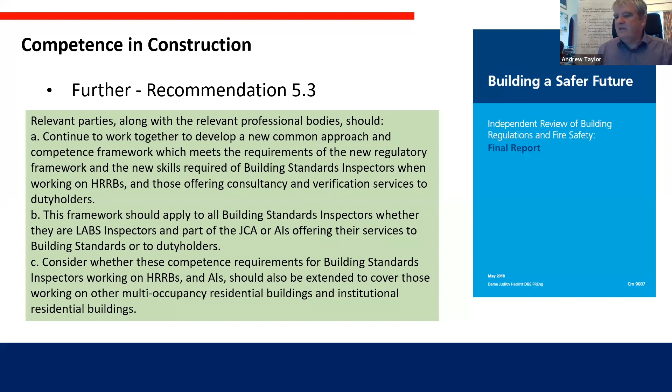So Dame Judith said to us, as an industry, you need to get more competent in dealing with these things. We recognize that, and I'm sure you've all seen that report, read that report, and are aware of it - or at least I hope you are. We'll find out that later.

Now at the moment there isn't a legal requirement currently. The closest thing we have to a legal requirement in England and Wales is this document, Regulation 7, Approved Document 7. It says, and the law states in the green box - text taken from the Building Act - that building work shall be carried out in a workmanlike manner.

So from a competence of install perspective, it's purely about a workmanlike manner. The document describes lots of different ways in which you can prove your work is being done in a workmanlike manner, the first being third-party certification. It also mentions self-certification schemes, history, and testing. Admittedly in our area there's not much done by testing - you don't tend to build parts of a building and set fire to it to check the fire stopping works. But those different methods of proving workmanship exist, and third-party certification is only one of them.

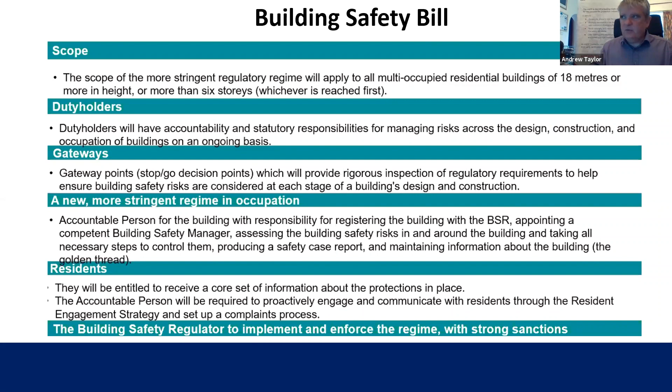Let's mention the pathway to getting through legislation for the Building Safety Bill. The draft bill came out in July last year and was sent to the Ministry of Housing, Communities and Local Government Select Committee for a process called pre-legislative scrutiny. They put out a call and there were about 350 responses, about half of them from people who said, I'm a leaseholder, I'm going to get saddled with a big bill, it's not fair.

ASFP put our comments in about the proposed testing system, and the select committee produced a report, which was produced around October or November last year. What was meant to happen thereafter was we would get a second draft and a response from government as to whether they would adopt the select committee recommendations, and if not, why not.

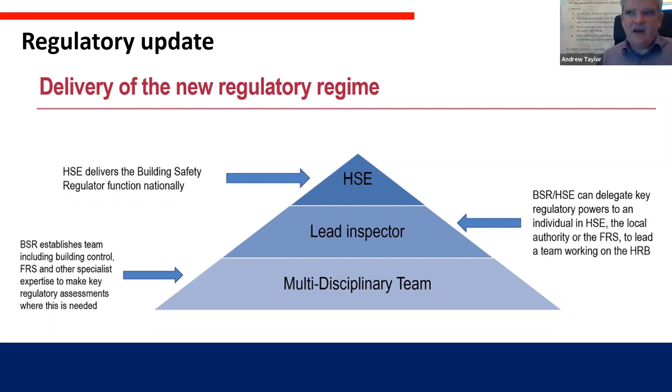We also have a gateway process. Gateway 1 occurs as part of the planning process, requiring a much more detailed fire assessment before you even get to design and permission to build. Gateway 1 gives us an extra step, and that's shown on the next slide.

Gateway 1 goes live under the new auspices of the new regulator as of the 1st of August. So if you're planning a new high risk structure after the 1st of August, there's a whole load of extra stuff to consider. You get a lot more detailed design work happening at the very concept stage before you reach technical design, permission to construct, and permission to occupy.

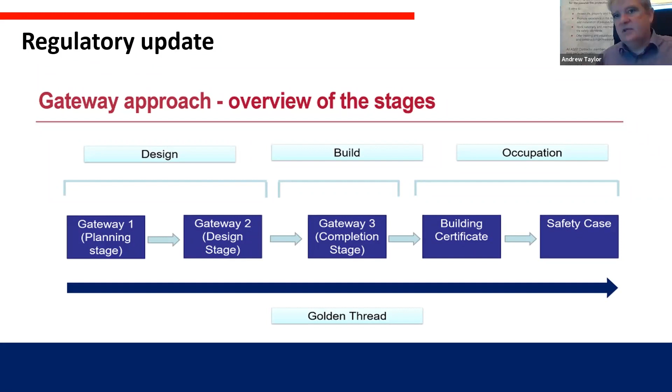As I said, the recommendation was to do secondary legislation concurrently with the primary Building Safety Bill, and we're already starting to see some of that secondary legislation coming out. So we see a new shadow regulator under HSE.

Peter Baker is our new Chief Inspector of Buildings. Gateway 1 goes live for high risk residential buildings as of the 1st of August. We've now got confirmation that the Office of Product Safety and Standards, OPSS, is the new construction product regulator lead, and they've been given a £10 million budget to set up a team to look at that.

There is one missing piece of secondary legislation: the definition of high risk. At the moment, high risk is set at an arbitrary 18-metre height. MHCLG ran a consultation in early 2020 asking for views, and the responses suggested we may need a more holistic approach. There's been mention that they may reduce 18 metres to 11 metres, but we're still awaiting the outcome of that consultation.

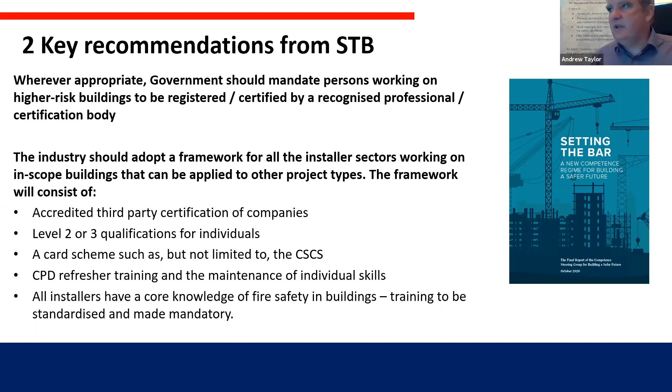Going forwards, the government's going to take on a higher profile role, and basically give this whole area of work to a committee of industry competence, which the regulator will sit on and lead. So the HSE will be involved, and they will be publishing in this area, for the moment, non-statutory advice and guidance. So there's information coming forwards there, and we'll look to see how that committee changes over the next 12-18 months.

Beyond that, I'm sure many of you will have seen this - BSI has published a document, BSI Flex 8670, which is a code of practice for competence in building safety, for construction. That document defines competence in terms of skills, knowledge, experience, and behaviours, and those 4 criteria are very, very important if you think about how we go forward.

So when we're looking at what will now happen, there will be a series of development of bespoke systems and competence schemes, and they need to consider those 4: skills, knowledge, experience, and behaviours.

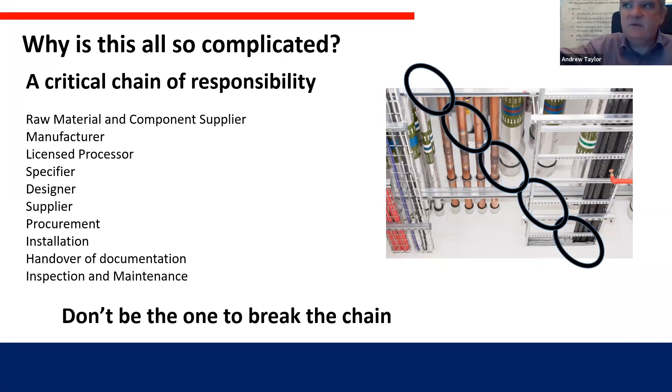Okay, so that covers competence. I'm going to blast through this next bit. Why is this all so complicated? Well, the answer is that when you look at something like that picture, there's a really critical chain of responsibility as it passes through, from raw material and component suppliers through to design specifiers, designers, suppliers, and you need all the people in the chain to be competent to ensure that is achieved correctly.

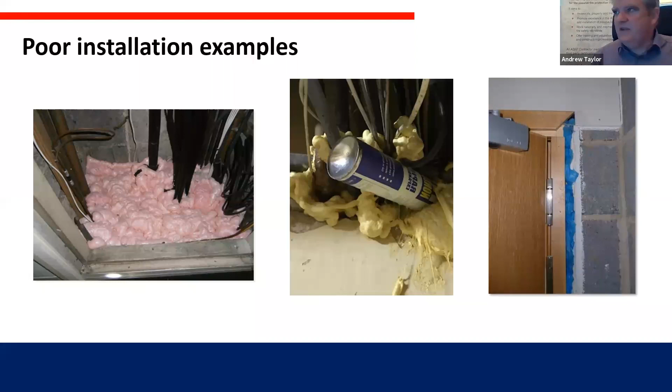And you'd far rather that than some of these things. We still see the pink foam seals appearing on LinkedIn. These are a couple of my favourite horror pictures. Whoever thought that shoe covers were fire resistant? It's obviously not been done properly, and they are historic, but we still see examples of these sorts of things.

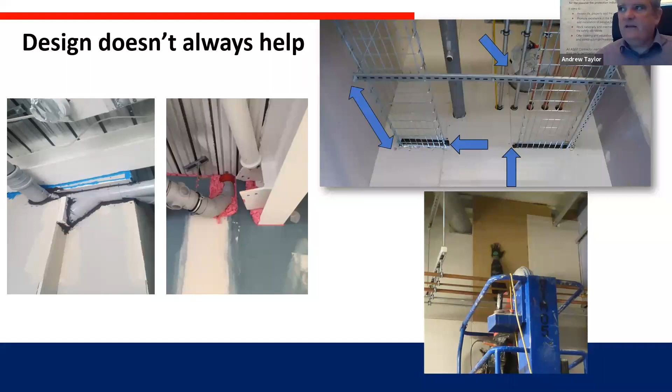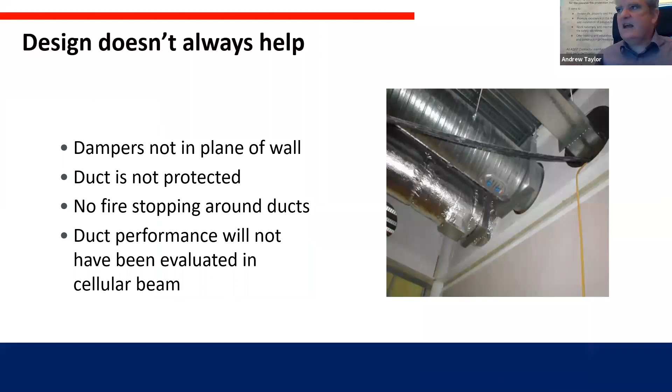And of course you get things like this, really quite complicated details where there's all sorts of complex interactions - have these been considered as you bring different building systems together? You've all seen, I've used this one before - whoever's done the job on this seal has installed a fantastic thing, spatial coordination, brilliant, but fire stopping, absolutely no chance. There is no standard at this stage - we're still working on one that would enable you to do that all in one fell swoop opening.

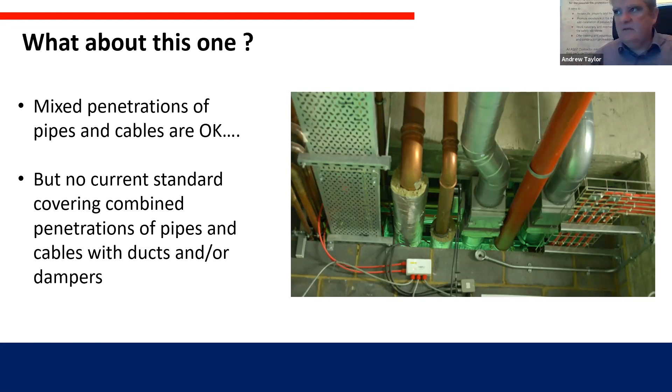So that's it, really. It's a very, very complicated subject, and I'm sorry it is, but if you don't deal with it correctly, you can potentially make mistakes.

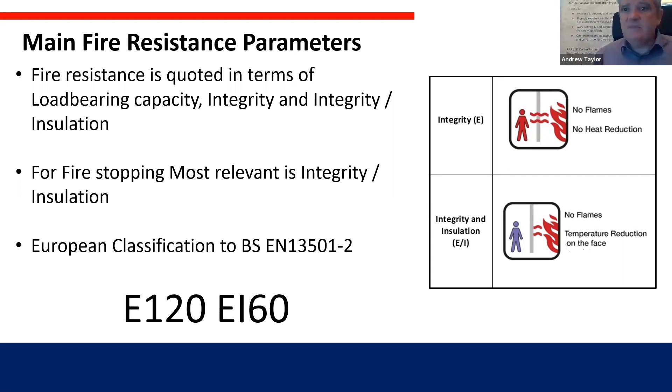We mentioned with those previous slides about design, why we design in that way. Well, one of the challenges is, of course, we have design and build. Now, whether under Hackitt, for the high risk buildings with Gateway 1, we'll have to see more and more of the design done up front rather than design and build. Design and build saves time, but conversely it means quite often you're still designing passive fire protection systems as you build the building, and you could have made mistakes very early on in the design, as we saw from that spatial coordination picture, which could leave you with problems.

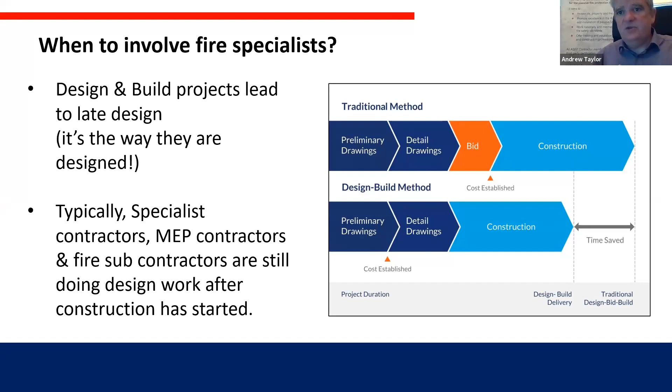So basically what you need to do is involve specialists as soon as possible, and don't leave it to design and build, because that way you could find you're going to end up costing yourself more money and more time, and leave yourself in a situation where you have to go for engineering judgments and technical evaluations to deliver your performance.

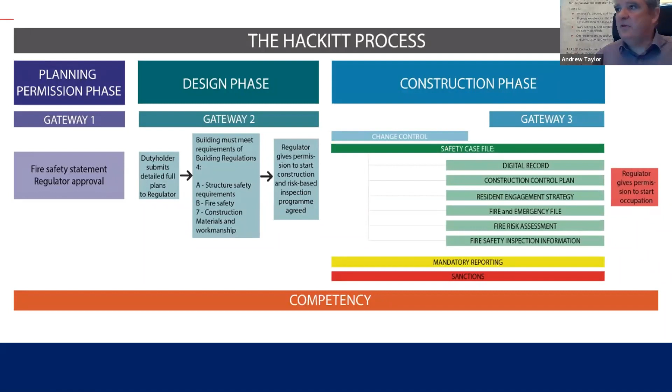So that's our Hackitt process. Hopefully what we'll see with this in Gateway 1 is that there'll have to be some sort of fire safety statement, and hopefully that will see more of the design work being done earlier, and therefore fewer situations where we produce something that's really difficult to do the passive fire protection for.

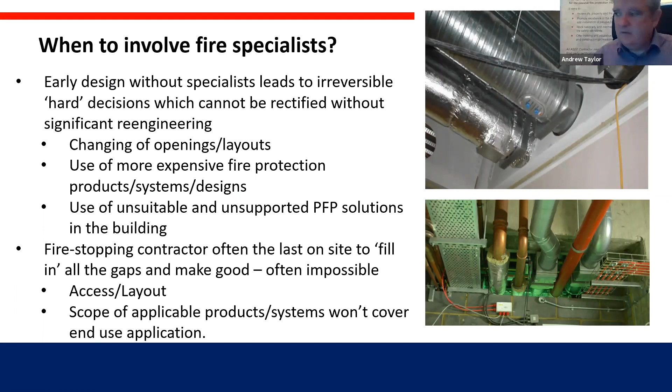Now beyond that, when to involve fire specialists - again, what I'm trying to say is get us in earlier and talk more about it, because you've got to do this to get it right.

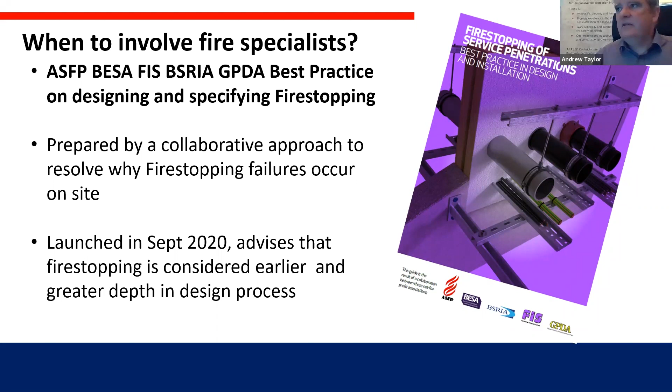We produced a joint guide with FIS, launched September last year, where in terms of fire stopping we said consider it earlier and in greater depth. We put that document on the website, and it has 9 golden rules.

Golden rule 1: talk earlier. One of the golden rules is talk in more detail later on, and make sure you've got third-party certificated products installed by third-party certified installers.

There are 37 questions that you would need when you're designing a fire stop - 37 questions in that guide. Are you going to have the answers to all of those 37 questions? That's why you need to be aware that there are 37 questions, and then make sure you've got the right people involved to ask those questions of.

Well, we'll canter through this bit. In terms of how to interpret evidence for PFP products, there's an awful lot of information out there, starting with the lowest quality and lowest verification being manufacturer's literature, all the way through to third-party product certification and CE mark, which is underpinned with all sorts of checks.

Manufacturer's literature and data sheets - if it says it's tested to, it's designed to, it complies with, you don't know if it was actually tested. If it's designed to or it complies with, you don't know whether it was even tested. Was the testing done impartially? Have you got the correct level of performance? The infamous burger pictures - is that potentially misleading?

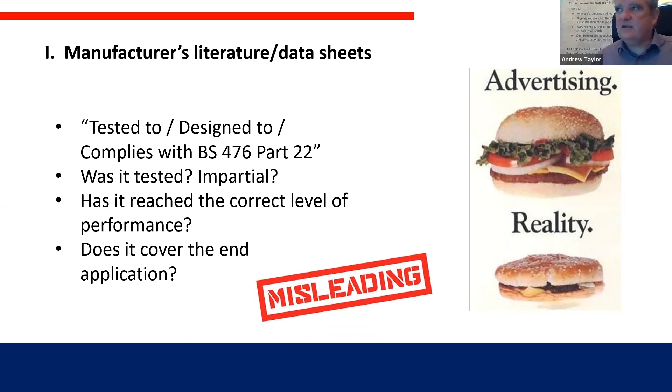A test report says a product's been tested, but it's only a snapshot of product performance, and it may not relate to what the factory is actually producing nowadays. My word of warning for all of these things is a test report can be a 50, 60, 70-page document with an awful lot of conclusions, which only a person skilled in the art of reading a test report can properly interpret.

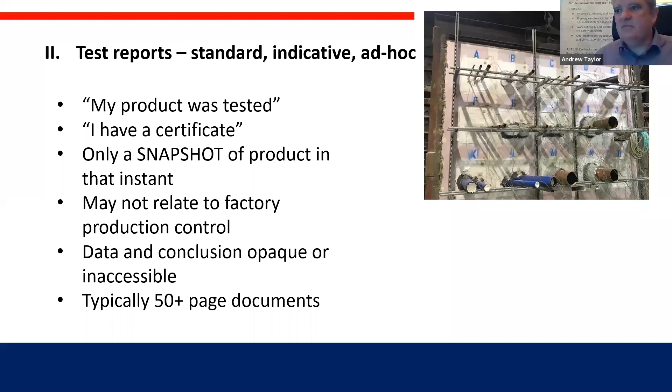But if you're looking to just take a test report and justify what you're constructing, that's a really difficult thing to do. There are a number of people who can do it, but usually they either work for a test lab or the manufacturers. And so the data and the conclusion can be opaque, so they're not necessarily the right thing.

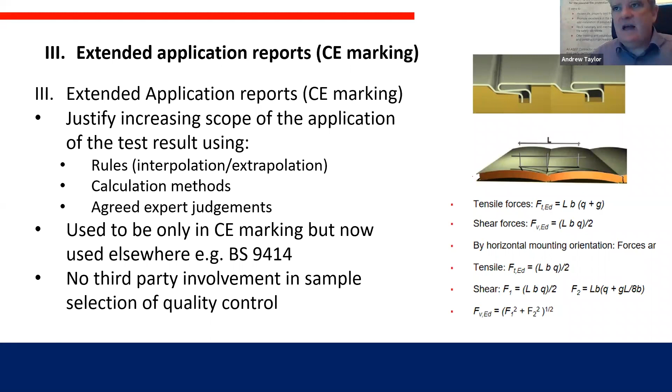Within CE marking, we've got a couple of other things: extended application reports, EXAPs. Used to be only in Europe, but we now see them coming into the UK, BS 9414 for external walls. There's no necessarily any third-party involvement in them, but they give you rules to take you going forwards with what you can and can't do with a particular piece of test data.

And then in Europe, you also get a thing called a classification report, which contains the classification of a product or system after testing. Again, what we're seeing now is that ADB is moving more and more towards classification reports. It's quoting EN 13501 Part 1 for reaction to fire, Part 2 for fire resistance, 3 and 4 for fire resistance. So classification reports are being required more and more.

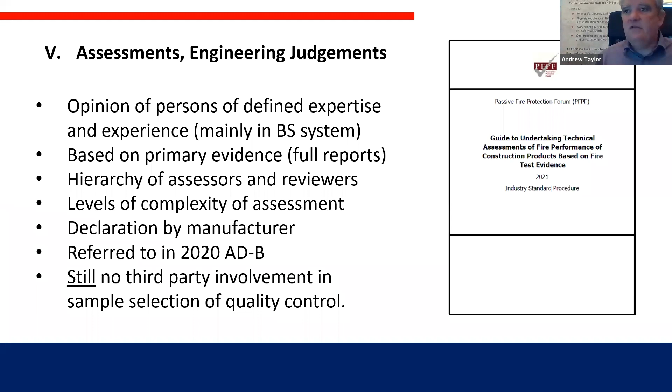Actually, probably a step down, assessments and engineering judgments. These are opinion. They still need to be based on primary evidence and a full report. This document here, which you can get off our website, the Passive Fire Protection Forum Guide, has a set of rules by which you can do these, because you will need these. ASFP's got a document, advisory note 17, that will explain areas where you're probably going to need one of these, and areas where you can't use one - it's inappropriate. So these are things, but there's still no third-party involvement in sample selection.

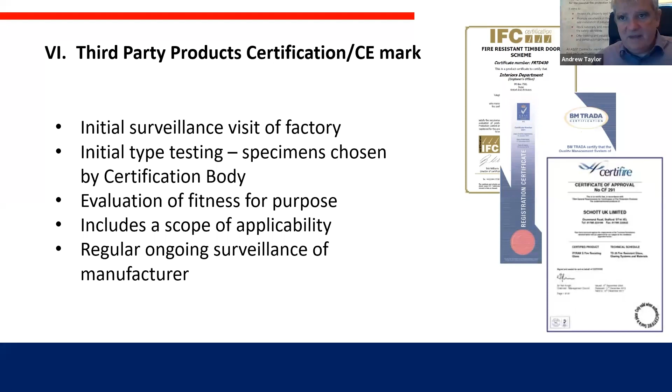And therefore that takes us to third-party certification and CE marking. We've got an initial surveillance visit to a factory. The specimens are chosen by the certification body. They're evaluated for fitness for purpose, and there's ongoing surveillance of the manufacturer, so you know that the product that's manufactured today and sold today is the same product you've got going forwards. And that takes us to the point that third-party certification and CE marking comes with markings.

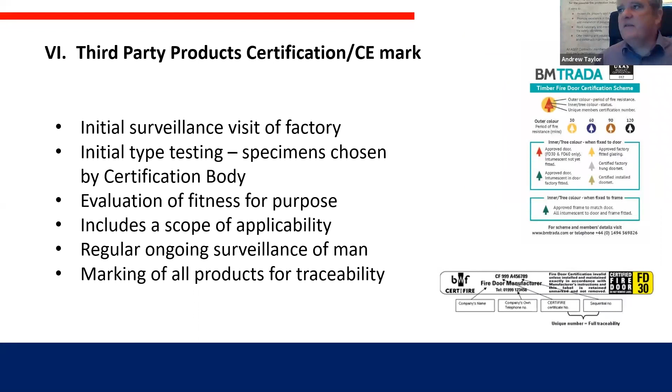So there's a number of certification bodies that get involved with this. That's definitely the route with the greatest rigor to ensure that the products you've got are going to be capable of delivering the performance you need.

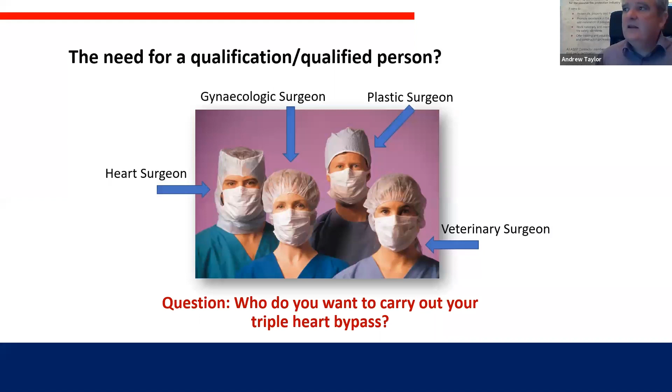And this then takes us to the same question, where I'm just going to give you 4 different job roles, and they're all wearing masks to be COVID secure, and ask you, who do you want to design and specify your passive fire protection?

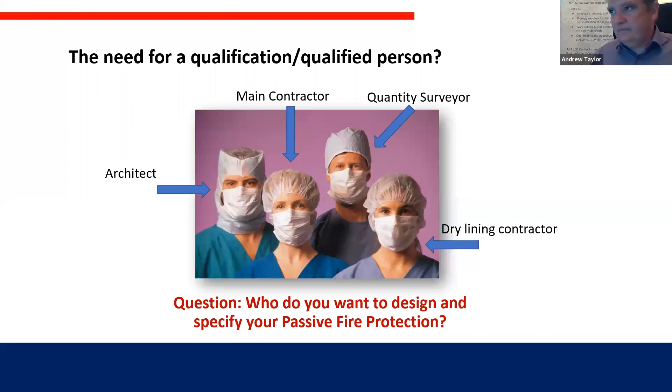And that gets me to poll question 4. So, are you getting ready for the new competence requirements within the Building Safety Bill? And we asked this previously, and the vast majority of people said yes, they were already looking to it, but let's see what we get from this particular organisation.

I've got 480 on the call, nearly 500 of you. Excellent.

So the good news is the vast majority of you are already looking at it and thinking of it. 3% of you have never heard of it. Okay, well, I hope that the 3% of you who haven't heard of this aren't in the UK. And interestingly, it's not relevant to what a number of you do.

Okay, right, I'm just going to mention briefly one of the things - there was a question earlier on, went through on the Q&A. As ASFP, we do organise training and education. We've got a foundation course that gives you an introduction in this, and we've got a level 3 certificate and a level 2 certificate in passive fire protection, jointly run.

We do the training, the examination is through the Institution of Fire Engineers, because they're fully qualified up. And so there's an awful lot of stuff in there. They give you a good holistic start and that, but in terms of competency, they give you knowledge.